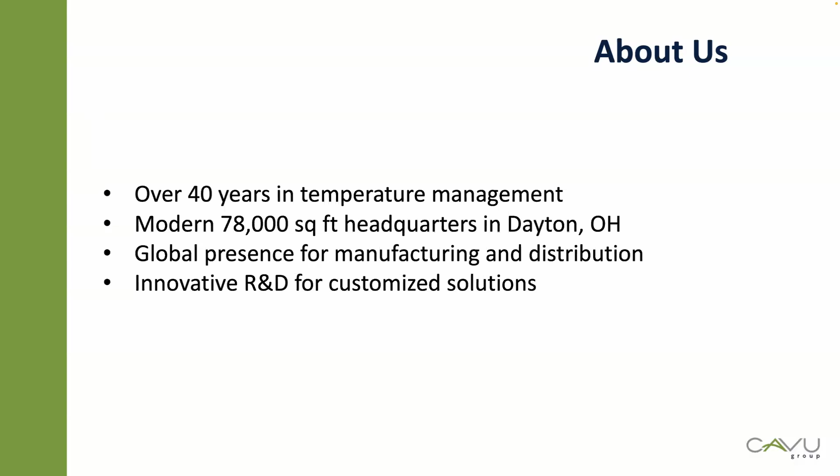You'll see our thirst for innovation and R&D specialty with some of the stuff that Iftikhar will be talking to you about today. Essentially, our mission as an organization is to develop advanced thermal solutions for companies concerned about how temperature affects their product safety and integrity. So basically, we want to make sure that what you have is safe for your customers and is delivered within the temperature range that you require it to be.

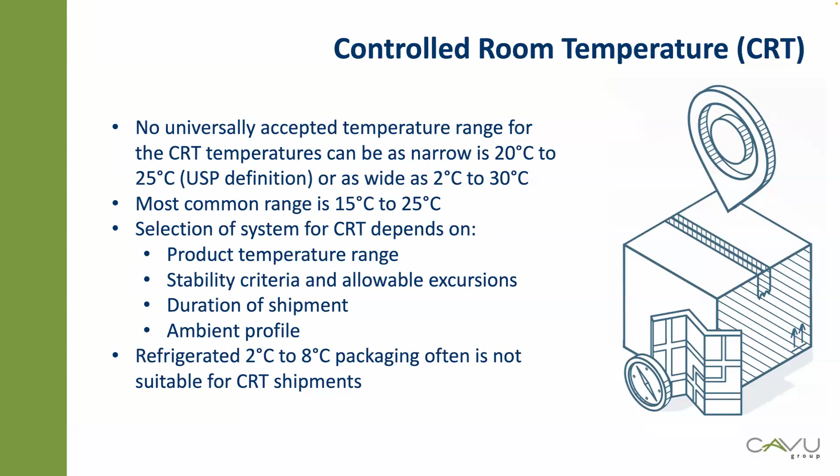Almost 30 out of these 55 drugs reference CRT range as a storage and transportation requirement. So more and more pharmaceuticals available in the market are operating in that controlled room temperature range, and I think the main reason is essentially convenience to the user. If you have a CRT product, it's easier to store at home and you don't require it to be refrigerated, where you can have all sorts of issues. If the refrigerator is not completely sealed or the temperature control is poor, you can lose efficacy of the product. So that is one of the main motivators of developing more and more CRT products.

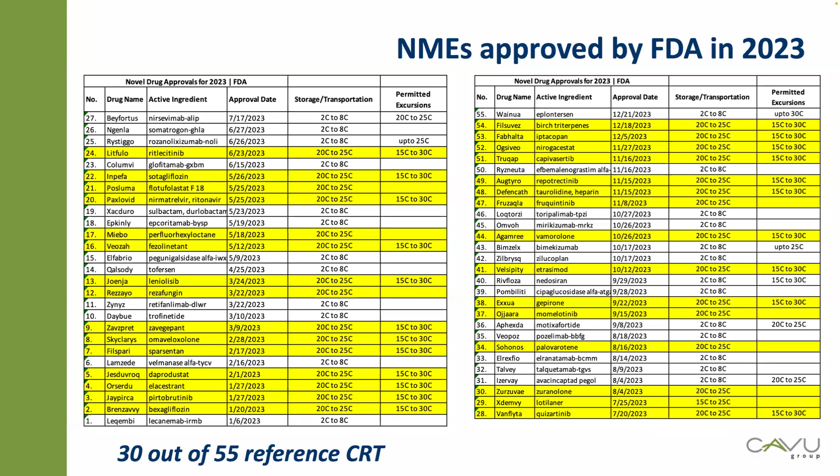Since you have a significant amount of CRT products being introduced into the market, the need for a specific CRT transportation shipping solution is becoming much more urgent and required. So let's look at - I had mentioned refrigerated pack out - you may already have a shipping system qualified for refrigerated shipment; how does it differ from a CRT shipping system? Let's look at some of the ambient profiles used to qualify these shipping systems.

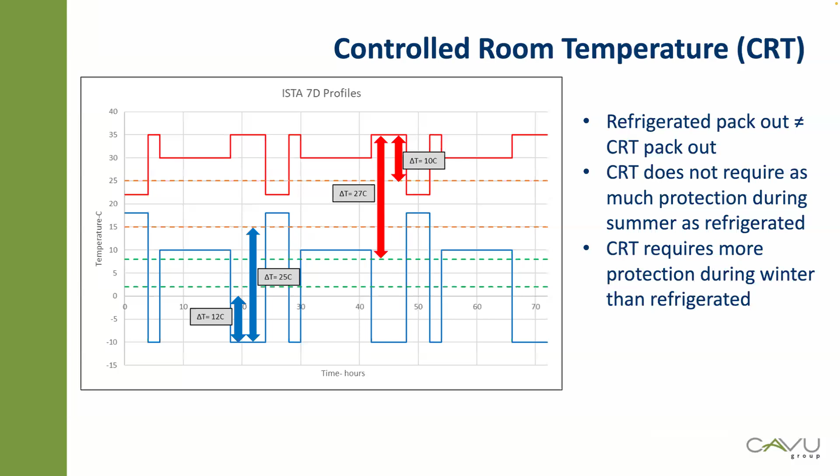So what are the main challenges for CRT packaging at this time? One important thing is that people want convenience - a shipping system available for year-round shipments. You don't have to worry about changing the pack out, changing the PCMs, staging material or gels, or conditioning requirements depending on weather conditions. That means you'd like to have a universal packaging system. However, for a standard ISTA profile like ISTA 7D, which is fairly challenging in terms of temperatures, developing a universal shipment for CRT is definitely a challenge.

Typical CRT packaging systems currently available would require different conditioning for summer and winter, even if they use the same kind of gels. You want to make sure the gel is frozen in summer so it can phase change with warm conditions, and you want the same gel to be liquid in winter so it starts freezing when it experiences cold temperature. So obviously there is some amount of temperature management that has to be done before the packaging system can be sent out.

Also, the phase change materials or gels used in these systems require conditioning at particular temperatures which are not readily available, or we can't use standard equipment for that. You may have to use specialized thermal chambers or incubators to condition those gels.

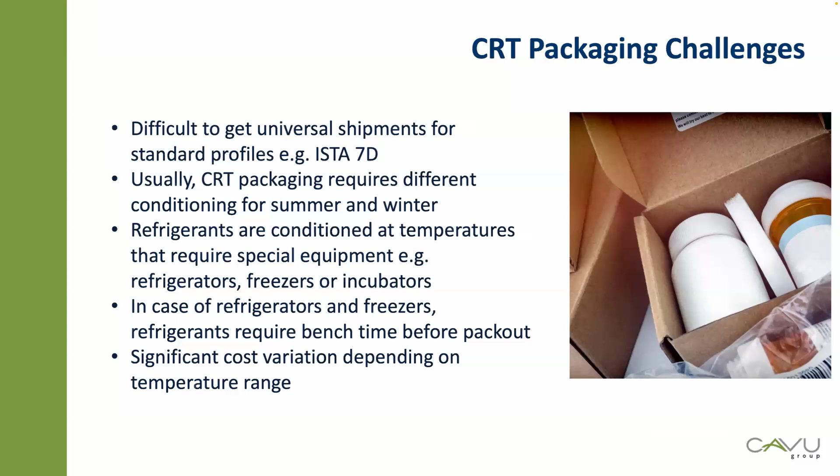Then another factor is the cost. There can be significant variation in the cost of the system depending on your temperature range. If you have a very narrow temperature range, say 20 to 25, you have to have very specific kinds of gels or phase change materials to maintain those temperatures, which can increase the cost. But if you have a much wider range, say 2 to 30 degrees centigrade, then the amount or kind of gel you use doesn't have to be as cost prohibitive.

Given all these factors, we looked at trying to come up with a system which would be simple, requiring minimum changeover during the year as you are shipping throughout the year. The product we developed is essentially called adaptek CRT365. This is a universal design, meaning you can ship it year round during winter and summer with the same amount of conditioning, the same temperature conditioning, and the same components used year round. So you don't have to change over with the season, and the system can work as efficiently throughout the year.

The system is designed to the most challenging industry standard, the ISTA 7D summer and winter profiles. This is a single-use system, qualified for 60+ hours of performance within a specific temperature range, maintaining 15 to 25 degrees centigrade for your products. All components in the system are conditioned at 20 degrees centigrade. No specialized equipment is required—you can condition at this temperature within a lab environment, and there is no bench time. So as the PCMs are conditioned, they can be packed straight into the shipper, and it is ready for shipment.

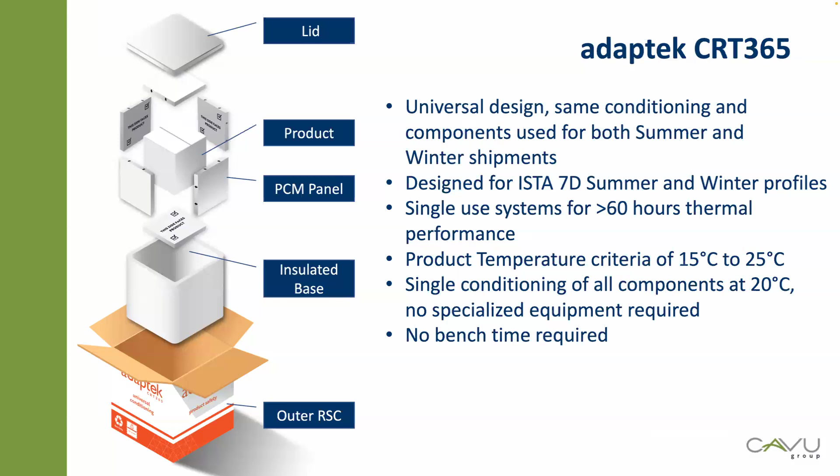One of the key elements in developing such a system was selecting the right kind of phase change material. That was one of the developmental challenges we had to work through, and I'd like to go through some of the elements required to develop such phase change materials.

Because we want to design a universal system, we want to make sure it would be a combination of different types of PCMs, since there would be a phase change material which works against protecting from warm temperatures as well as from cold ambient conditions. Another challenge is to make sure these PCMs have a phase change temperature range within the specified product temperature range—that is, they should phase between 15C and 25C.

Another important factor is that we want these PCM phase temperatures to have minimum variation around their phase point, which is very critical, because if you're operating within a range of 15 to 25C, you want to make sure the PCMs phase within that range and don't vary a lot, since the chances of getting out of criteria can be high. This is something I'll explain in the next slide. For engineered PCMs, this is a challenge compared to, say, using water.

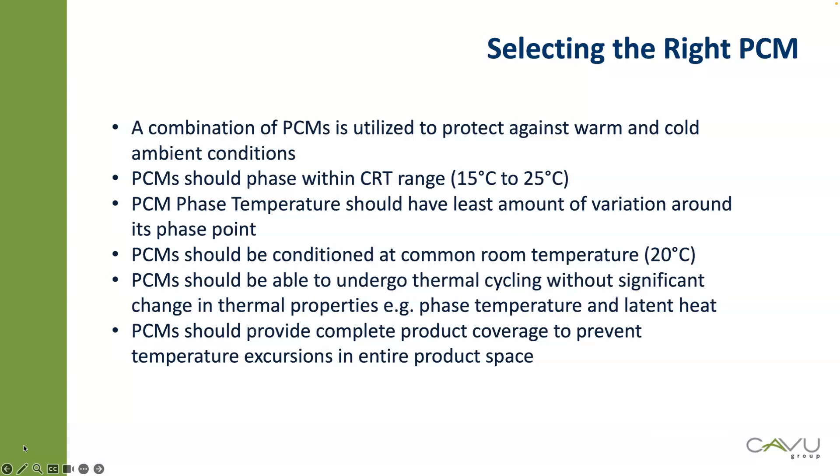Another important factor is that the PCMs should be encapsulated in such a way that they provide complete coverage of the product, to prevent any temperature excursions within that product space. If you've ever done thermal testing, especially with large product payloads, you'll notice a significant temperature difference from the center of the product space to the corners. So the objective was to make sure the PCMs are applied to provide as much surface coverage of the product as possible, to prevent these temperature excursions.

So I was talking about the variation in phase temperature. I want to give an example of the challenges here. One of the PCMs developed was a warm PCM, which would protect against hot ambient conditions. This PCM had to be conditioned in a fairly narrow range, completely solid before being packed out, conditioned between 20 and 25 degrees. The first PCM we developed had a freeze temperature very close to 20 degrees centigrade.

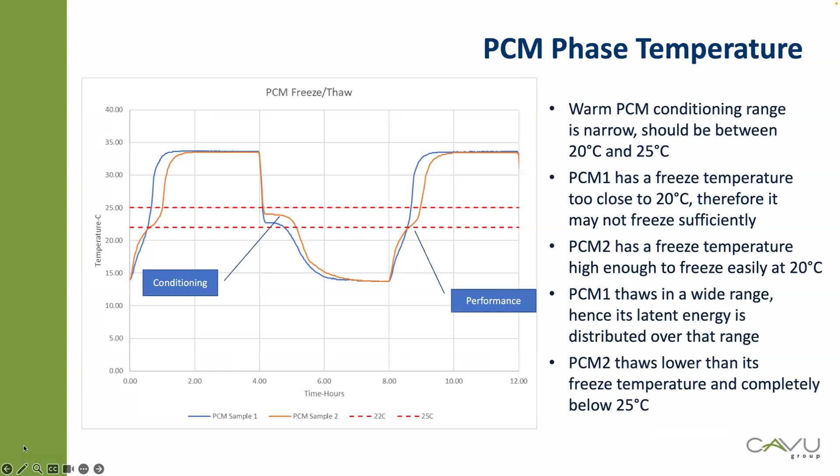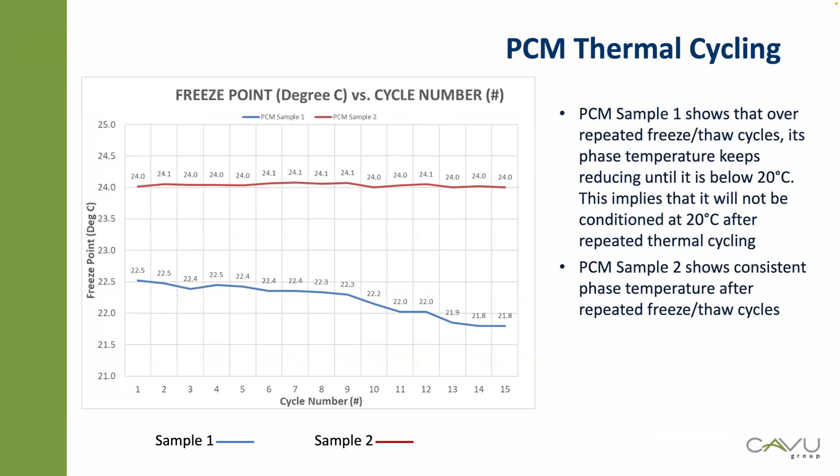Another important property of PCMs in terms of performance is thermal conductivity. Thermal conductivity is a property of a material which determines the rate of heat transfer within that material.

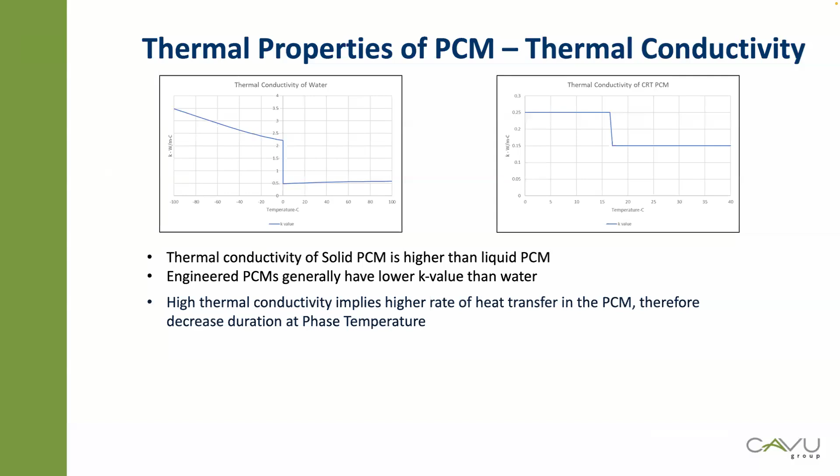Another secondary thermal property of PCMs, useful in maintaining temperatures, is the specific heat. The specific heat is basically the sensible heat gain for a material — the amount of energy required to raise the temperature of a unit mass of material by one unit degree.

Again, the specific heat value changes significantly from solid to liquid state. Water is unique in that it has a much higher specific heat in its liquid state than most other materials. That means once your gel or frozen PCM is completely phase changed into liquid, there will be a rise in temperature as heat is absorbed. That rate of increase is determined by the specific heat — the larger the specific heat, the slower the rate of heat gain and temperature rise, which means you can gain some additional duration within the temperature criteria.

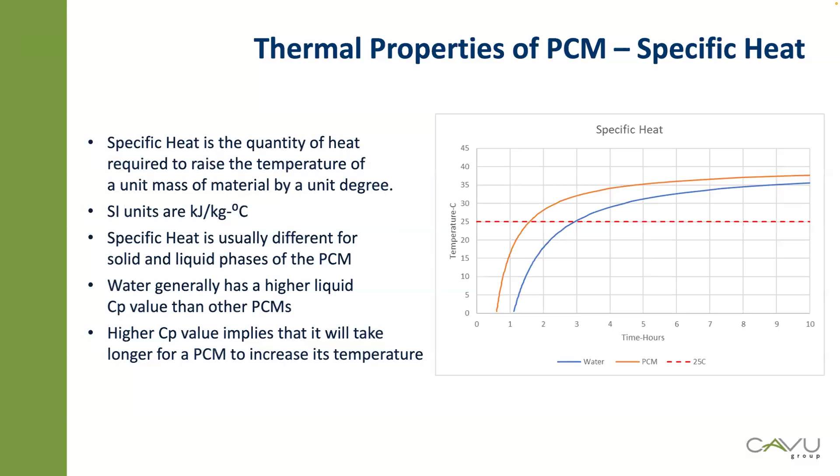Unfortunately, there aren't many phase change materials which can compete with water in terms of its liquid CP value. But when developing a PCM, one of the things to keep in mind is to try to increase the liquid CP value of these PCMs.

Now, the most important thermal property of PCMs is essentially the latent energy. The latent energy is the energy required by a unit mass of PCM to completely change phase from solid to liquid or liquid to solid. That is the property of phase change materials utilized in a shipping system to maintain temperatures. The latent heat energy of a unit mass is directly proportional to the duration you have to maintain a particular temperature, the phase temperature.

So if we go to a CRT PCM material like PCM 18, which phases at 18 degrees centigrade, the latent energy for such a PCM would be much lower — about 190, roughly 40% less than water. This means that for the same amount of PCM, you get less duration compared to water, or you will need more PCM in terms of mass than water to achieve the same duration.

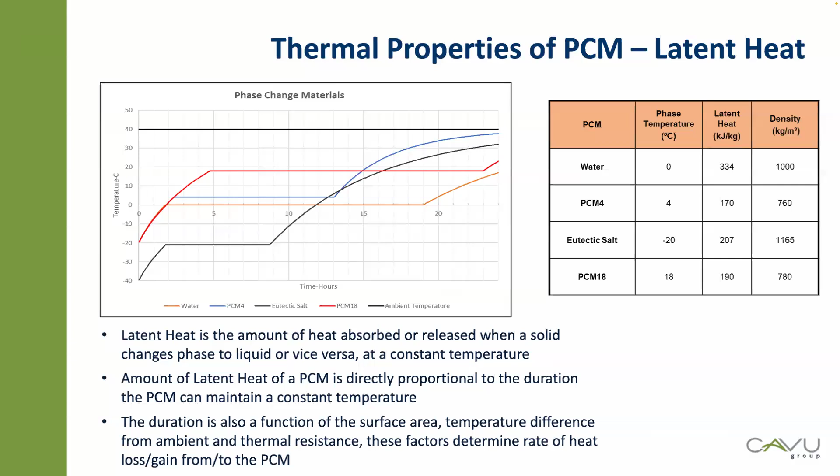But if you look at the 18C PCM, it has a comparable duration — a little less than water, but still very comparable. The reason is, even though it has less latent energy, the delta T from ambient is less because it is phasing at 18 degrees. That delta T is less than what water would have, which is about 40 degrees, and 18C is almost half. That is also a factor in how PCMs behave in different temperature conditions.

Another challenge which I had mentioned in our design of the CRT system was to provide as complete product surface coverage as possible. So I just wanted to give you some examples of what happens when you don't have adequate coverage of product with phase change materials.

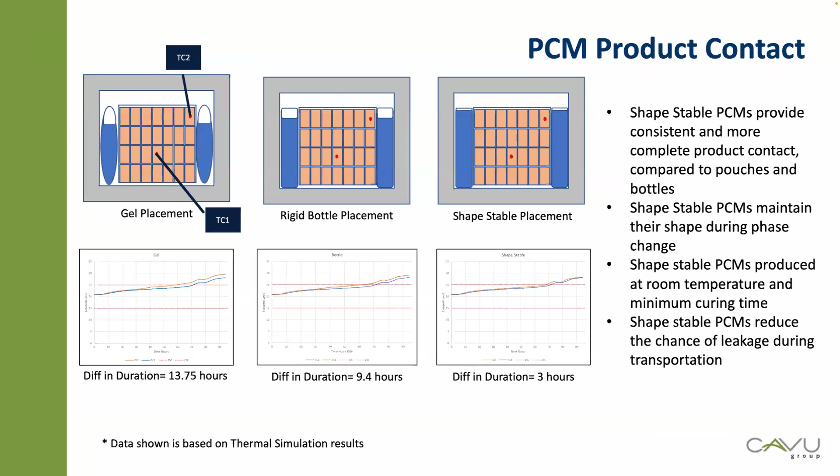Once we developed appropriate PCMs for our CRT system, the next step was to actually design a complete system, including the insulation, the placement of the PCMs, the sizing of the PCMs, and then optimization of these properties to come up with the final product design.

One of the tools we use very frequently and very effectively is thermal modeling. Thermal modeling tools are used to come up with an initial conceptual design of the packaging system, and the results obtained can be used to optimize various parameters. For example, if we have a variety of PCMs to use, we can try different types, optimizing their thermal properties to understand the effect on overall thermal performance. Properties like thermal conductivity, latent heat, and phase change temperatures can all be optimized using this thermal modeling approach.

Another factor we looked into was the actual insulation. The single-use adaptek CRT 365 system uses expanded polystyrene, EPS, as its insulation material.

Using thermal modeling, we can determine the dimensions and thickness of the insulation needed for the required durations, as well as the PCM layout and configuration, how we position the PCMs within the product space. We also look at product coverage and what kind of temperature gradients we are getting in the product space, which can be determined as well.

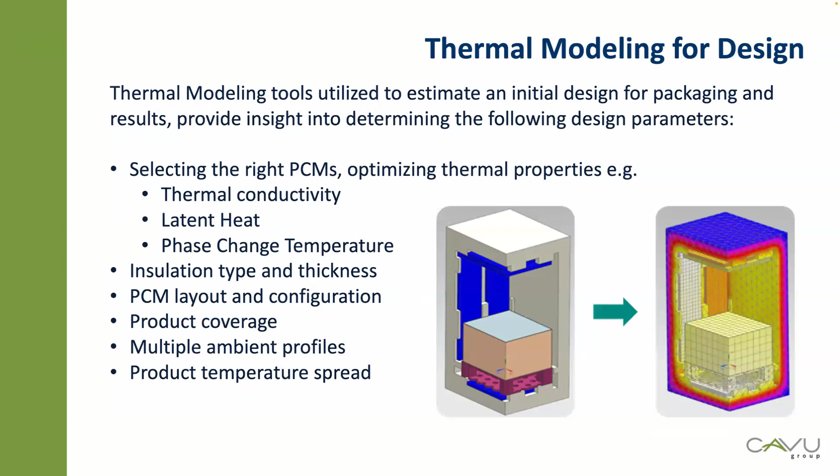Just a little bit about the thermal modeling process, how we go about developing a thermal model and what kind of results we get from it.

The system is developed as a 3D model in CAD, as you can see on the top left. Using that system, we develop what we call a numerical model, or a finite element model, which can be made more efficient based on the original CAD geometry. If the geometry is symmetrical, as you can see it is, we can reduce the model's size to a quarter symmetry, which saves effort and time when developing and solving the model.

There are additional tools within the software that allow us to simplify certain geometric details. For example, in the third image, there's an EPS post in the corner that doesn't have to be specifically modeled in the simulation. We have tools that allow us to create thermal connections without actually having geometry, so we can create a connection between the PCM pouches, shown in red, and the walls of the EPS container without any geometry in between.

Once we've cleaned up the geometry and developed the finite element model, the next step is to define the initial and boundary conditions. The system will have certain initial temperatures at the start of the shipment - the PCMs have been conditioned at 20 degrees C, the product may be at 22 C - and then we apply a boundary condition, which is basically the environment or ambient profile. In this case, the ISTA 7D profile is applied on the outer surfaces of the container.

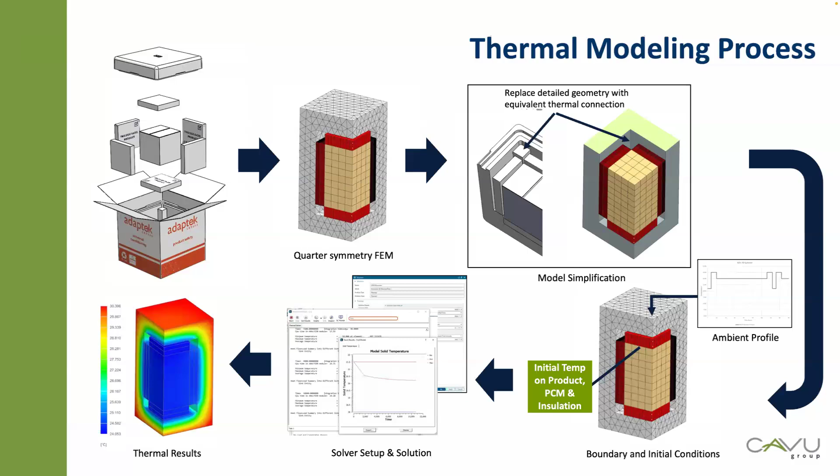Some of the results you get from the software give you good physical insight into your system and allow you to optimize it. The primary results are temperature distribution at each time interval - what we call a transient solution. If you're running for 72 hours, you can recover temperatures at every hour and examine how the temperature changes over time, plotting them as graphs to look at temperature performance at different locations within the product space.

Another important consideration is the temperature gradient, or the difference in temperature within the product space. The temperature can differ from the center of the product space all the way to the corner, where it's usually a bit higher. This can also be assessed - a data set of temperature gradients can be plotted over the system to see where you have high gradients. For example, the blue shows about 0.06 to 0.1 degree centigrade difference within the product space, which is very good, but as you go towards the insulation, you see a significant amount of temperature difference.

Another useful tool in simulation is to look at the phase quality of PCMs. The phase quality shows you the status of the PCM as it is melting from solid to liquid state, or liquid to solid state.

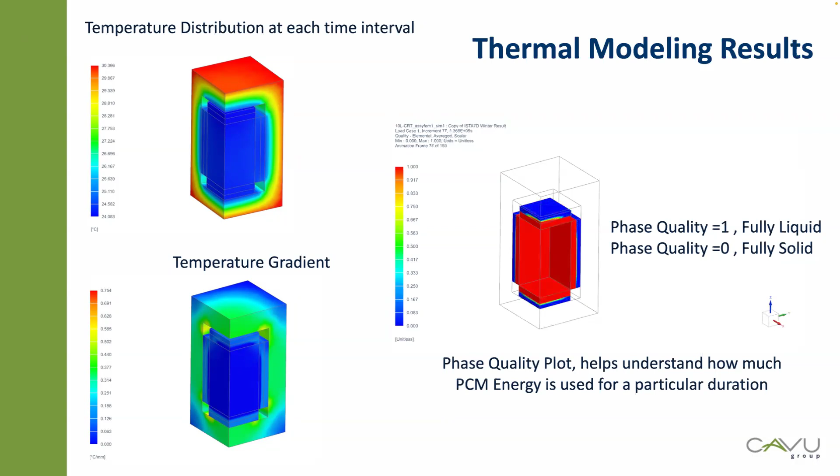So in this animation, the blue sectors are essentially the cold PCM, the PCM that was frozen initially. It shows how it starts melting as more heat is applied. This is a valuable tool because it allows us to understand if we've overestimated or underestimated the mass of PCM in the system. If at the end of the simulation there is a significant amount of PCM still solid, that means our estimation of the mass is over, and we can optimize and reduce the mass of PCM in there.

So I'd like to share, we developed the CRT 365 system for two different payloads, a 5-liter payload and a 10-liter payload. We did a triplicate qualification against the ISTA 7D profiles, and I wanted to share some results. All that process of developing the phase change materials, their properties, and then developing the system and doing thermal modeling and optimization was done without creating a prototype.

Once we had the final system optimized in our thermal software, that's when we went and actually developed the prototypes for the various components and put them together. We did some design testing first, and our design testing was minimized because of our approach with this type of optimization, and we were able to go to qualification very quickly.

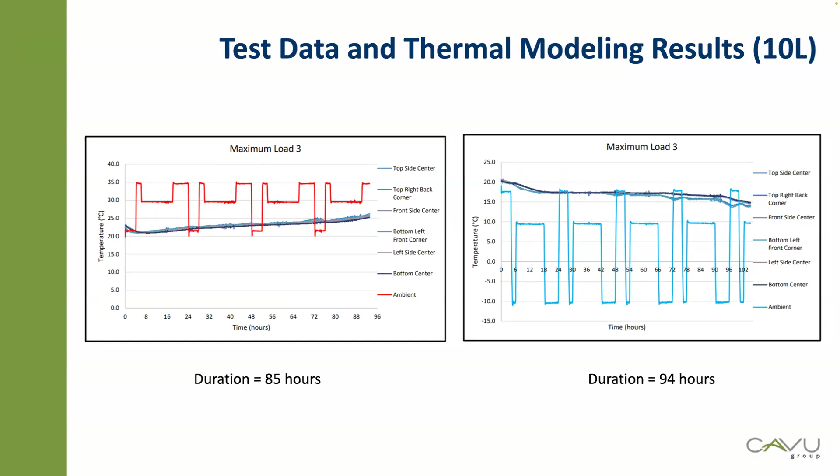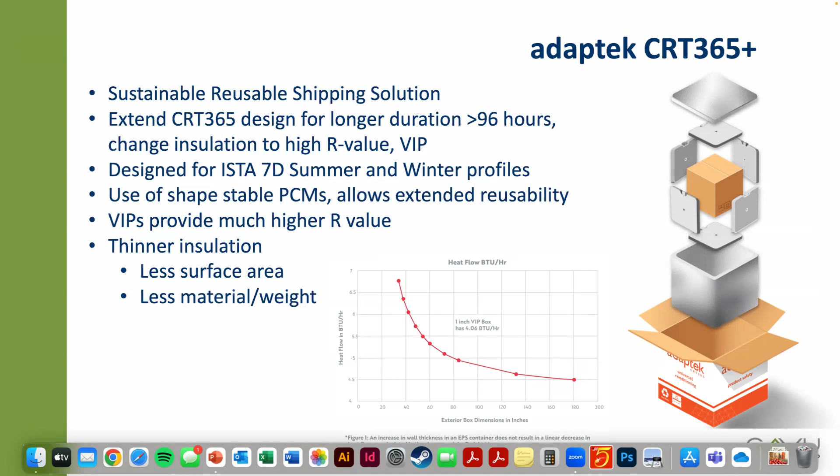Our future development, which we are working on, is basically extending our CRT 365 design to develop a sustainable, reusable shipping system. This will also be a longer duration shipping system, performing for a minimum of 96 hours and over. What we're doing is utilizing the same internal components, the same payload size, the same phase change materials - all components will be exactly the same, except the outer insulation will be different. Instead of using EPS, we'll be utilizing vacuum insulated panels, a higher R value insulation, which will allow us to extend our duration to more than 96 hours.

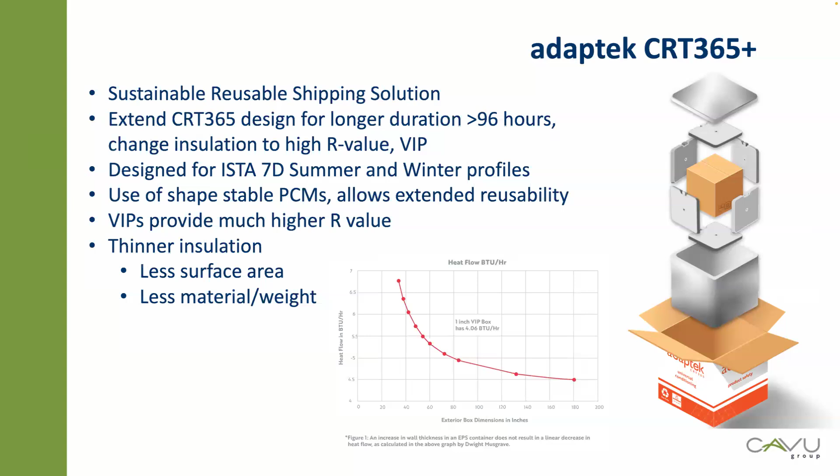Again, the system will be designed for the same profiles, the ISTA 7D summer and winter profiles. We will utilize our shape stable PCM materials in the system as well. The shape stable PCMs allow them to be reused multiple times, which goes towards the goal of making this a sustainable, reusable system. I'm sure some of you are familiar with vacuum insulated panels - they provide a much higher R value compared to other insulation materials, which means you can use much thinner insulation. The dimensions will be much less than polystyrene, which implies less material, less weight, and less shipping costs.

Some of the innovations we are bringing to our reusable system is a different approach to VIP panels. If you're familiar with VIP boxes, they usually consist of vacuum insulated panels, individual panels, 6 of them, put together into a box format. Individually, VIPs have very high R value. However, once you put them together into a box format, the overall R value of the box will go down.

The reason is because of leaks. Since you are putting 6 panels together, there will always be some edge leaks along the edges where they come together, and that brings down the R value - typically by 30 to 40%. So we wanted to address that, and we developed a system where we have single panels which can be folded into walls, minimizing the amount of edges that can leak. Overall, this box will have about half the edges of a typical VIP box, hence a higher R value for the same size, meaning we can go to a thinner wall than typical VIP boxes.

Typical VIP boxes will use a 1-inch wall panel. In our case, it will be less than that, which means lower dimensional weight and lower transportation costs.

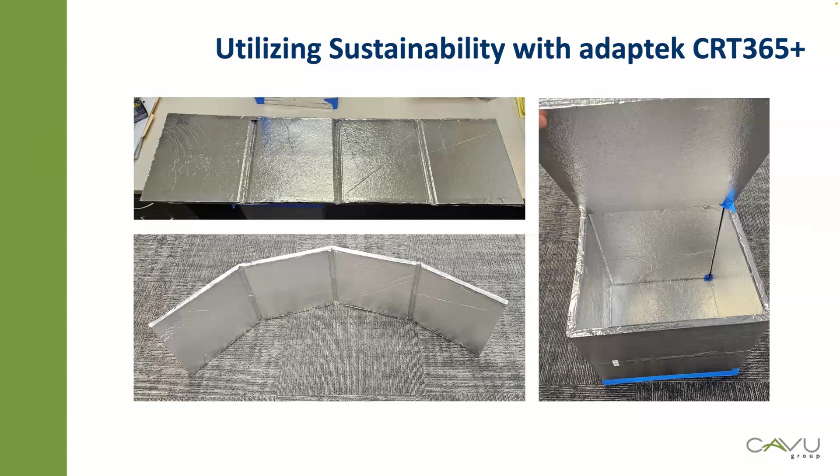The reason is that external shell is essential for this type of VIP container, and the lid, the external lid, will push down the VIP lid onto the walls and create a secure connection. That is still work ongoing, and once that is done, the performance will be better than what we have tested so far.

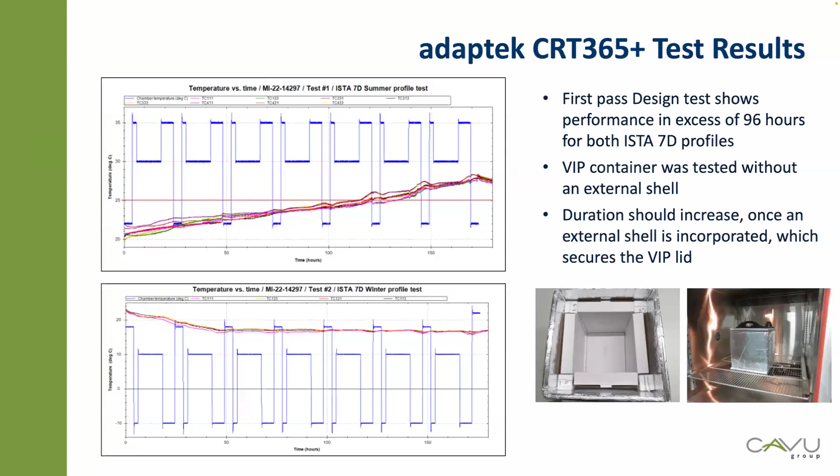So I think that's the end of my presentation. I will then leave it up to you guys. If you have questions, I will be very happy to answer them.

Iftikhar, we did have a couple questions come in. The first question says, can you use water in combination with PCM in CRT packaging?

The answer is qualified yes. Some people do use that, but I think the problem becomes is why do you use water, which is to basically condition the PCMs. So you can use a combination of water and PCMs where water can be frozen, or it can be at 5 degrees centigrade, and then it comes into contact with the PCM, which is at a room temperature range, and it conditions it.

The problem with those things is that the water conditioning has to be changed for different seasons. So if you are shipping in the summer, the water can be cold, like at 5C, so that it conditions the PCM. But in winter, you can't use 5C because you don't want to freeze the PCM in the beginning. The PCM has to freeze while it is experiencing cold temperatures during transport. So the answer is yes, but you will still have to do a fair amount of temperature management and conditioning management.